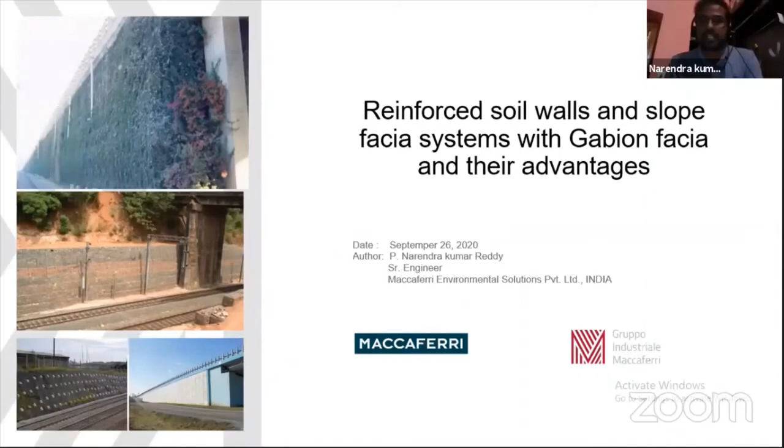Taking this opportunity to share some of the knowledge we have learned during our experience, I would like to give a concept of reinforced soil walls and slope fascia systems, especially the advanced technology ongoing in India with Gabion fascia, and their special advantages compared to conventional systems.

Covering all the chapters under this topic, I would like to cover the typical problems and the solutions we can provide regarding the same, the design guidelines for reinforced soil slopes as well as soil walls, along with Gabion gravity walls, which are an advanced gravity retaining wall taking a major part of projects in India, and various case histories covering these types of flexible retaining walls.

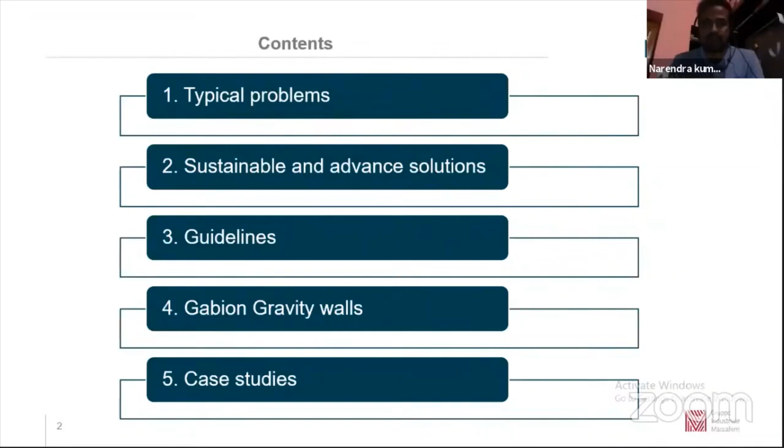Coming to the typical problems where we observe these types of failures, and how we can address them with suitable solutions: whatever the infrastructure, whether railways or highways, we observe sudden failures at sites, such as deep-seated failures and surface erosion. Natural slopes, steep slopes, highway embankments or railway embankments not properly taken care of during construction also show these failures. The major cause is improper drainage of the in-situ soil as well as natural cut slopes, or improper drainage facilities not taken care of during construction of these highway embankments.

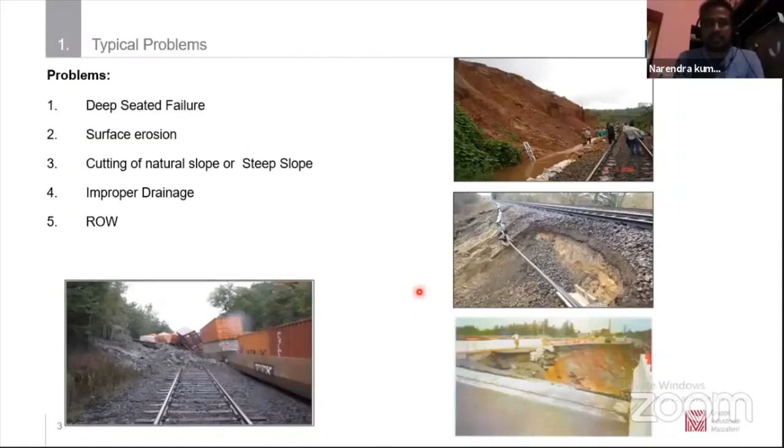Also, in some places there will be right-of-way widening issues, where emergency construction might have been done due to emergency projects, and proper steps might not have been taken in constructing this type of infrastructure. How to address these problems we can discuss in the later slides, along with related solutions we have developed through so many projects, covered in case histories in the later slides.

Before that, I would like to give a concept about the reinforced soil system. Every civil and geotechnical engineer might be aware that soil or any granular material is weak in tension, and to reinforce it we include synthetic material, whether geosynthetic or metallic reinforcement. We term this as reinforcement, and this entire concept has developed so many projects all over the world, with advanced solutions developing day to day.

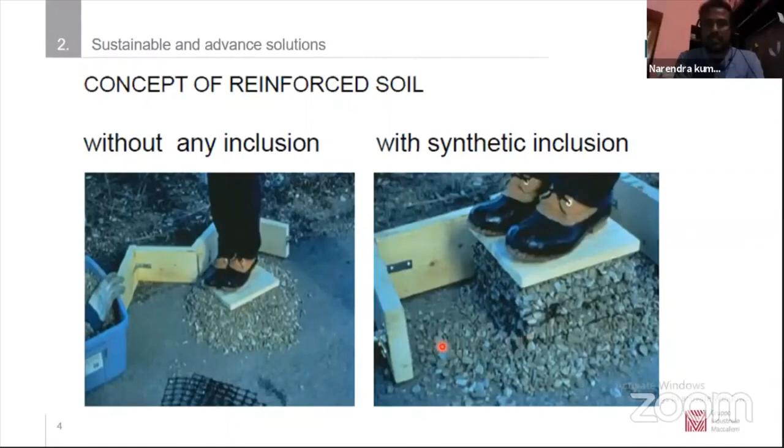I would like to give a brief of this, and how various types of geotechnical solutions can be addressed with these reinforced soil slope systems as well as soil wall systems.

Before going into the depth of the main agenda and the main systems I would like to discuss, I would like to give a brief about the types of walls based on various fascia systems. Our colleague has already provided details of the concrete fascia panel system, covering this discrete panel system.

This is the wraparound fascia system, in which the reinforcement material itself acts as the fascia as well as the reinforcement material for the reinforced soil walls as well as slopes.

And here comes the segmental block system, designed based on regular spacing of the reinforcement along with a suitable fascia system applicable for the project site condition, either the Gabion fascia I am going to explain, or the concrete type of fascia.

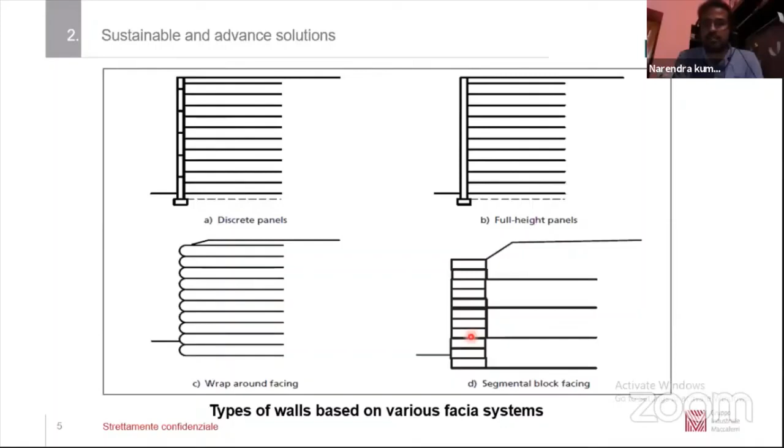Coming to reinforced soil slopes, wherever we observe landslide failures or hill cut slopes with ample space to stabilize, we can go with shallow slopes - that is, reinforced soil slope with gentle slope material. Wherever there are space restraint problems at site locations, we can give reinforced soil slope with steep slopes, which may be greater than 45 degrees. With a confinement system, we can provide advanced geotechnical solutions along with reinforcement to stabilize that failed slope.

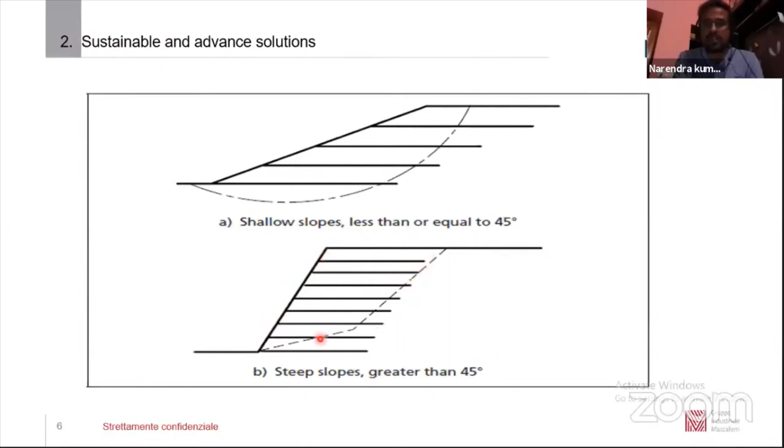Before going into types of fascias and reinforced soil walls and slope systems, I would like to give a brief about how we arrive at the design of the structure. After visiting the site as an engineer, any client facing a problem at the site will first request us to visit. After visiting, we should analyze the size of the structure that can be feasible at the site.

That is the initial size of the structure, whether as per designs it will be feasible or not. Then we can quickly model the same in any reputed or universal software, with some external stability checks that need to be checked. And there comes the selection of the type of reinforcement.

If this reinforced soil slope system is the only geotechnical solution suitable for the site condition, we should first check the type of reinforcement suitable for that environment. Based on that, we should check the internal stability of each and every reinforcement we will give as input for the design.

Coming to that, there are three types of design methods, covered in any codal provision. In that, we should check the tensile forces of the reinforcement required for each layer of the reinforced soil systems.

And we should check the internal stability. Under internal stability, based on various design methods, there will be various design checks for the reinforcement. In one method, rupture and adherence of the reinforcement should be checked. In another method, we should check the adherence capacity of the reinforcement with the reinforced soil fill. Then wedge stability check, as well as serviceability under the settlement criteria, should be checked to confirm the design.

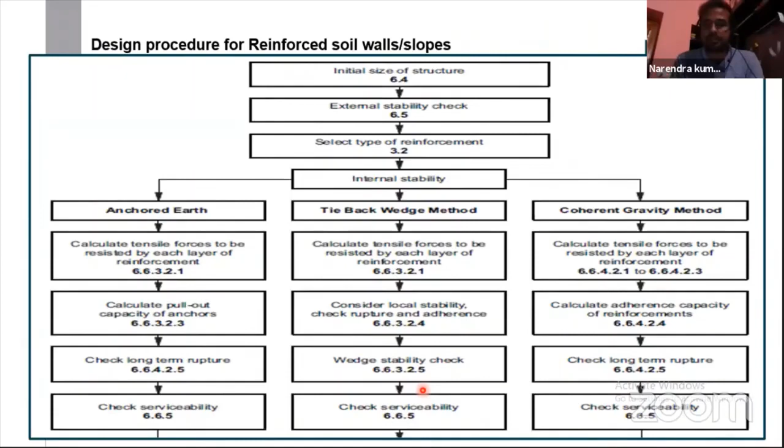Coming to the minimum geometries which we can judge at the site, we should check this, and there should be a thumb rule for the site after visiting it, regarding what type of structure can be feasible for retaining the slopes there.

For example, if we have only 3 meters minimum available, we should give a design for 15-meter height. Say the height of the wall required will be 15 meters. Then walls with normal retaining function should have minimum reinforcement at the base of about 0.7 times the total height of the wall, or that much space is not available at the site.

At least 3 meters minimum we should start with for the geometry. Based on the various types of abutments, as well as trapezoidal walls and abutments, as well as stepped walls and abutments, various types of reinforcements and geometry will be cross-checked as a thumb rule, and then we can step into the design part.

For walls less than 1.5 meters, generally this type of normal retaining wall can be constructed as well as designed. And I think these trapezoidal walls and various other types of walls have been covered by our colleague Mr. Harshit in the earlier session.

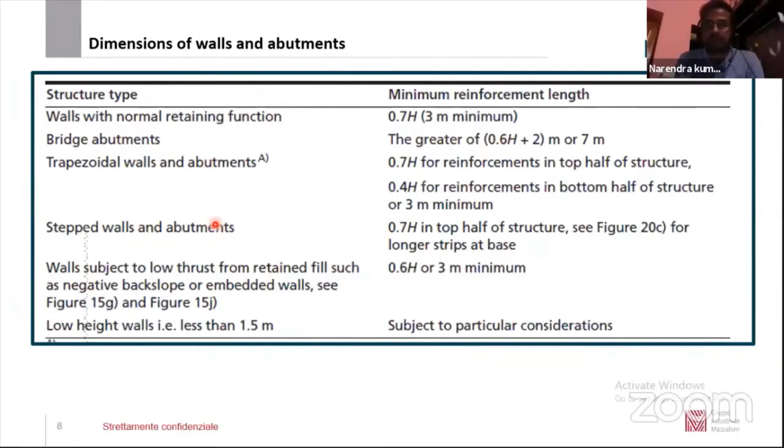Coming to the stability checks, this might have been covered by our colleague, but I would like to detail it again. Whatever the external stability checks for a wall may be, after modeling and cross-checking suitability for the site condition, we should check as per the foundation soil availability whether that wall is safe under bearing or not.

As well as tilting failure, and whether the entire block of the soil wall is safe in sliding or not, we need to check that. And as an overturning stability and overall stability, whether it is safe or not, that also needs to be checked.

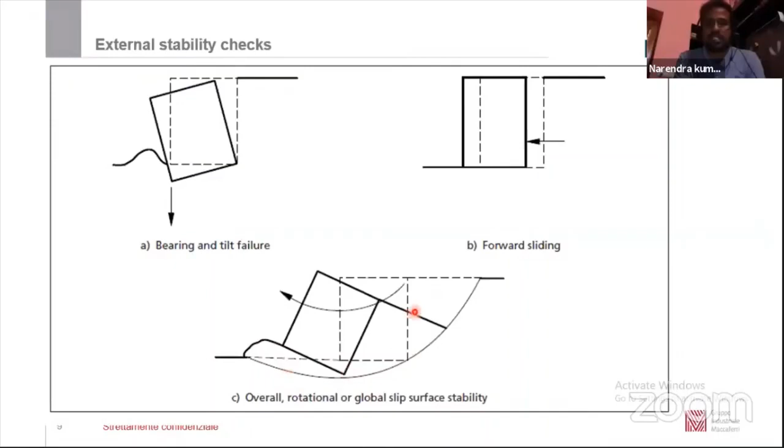Coming to the same, based on different applications and different codes, whatever it may be, we will be choosing so many Indian standard codes as well as whatever is suitable for the particular type of flexible system.

We will be using, as per BS 8006 part 1, it talks about so many loads and additional factors which need to be considered under static analysis. Under static condition, for each and every stability check, the factor of safety will be 1, because in addition to the loads there will be some partial factors which we will be taking into account.

In terms of seismic analysis, as per the FHWA, we will check the external stability analysis, as well as internal stability, which is how much strength of the geogrid is required for the entire soil wall and soil slope. For this we will target a factor of safety of 1.125, varying as per the various codal provisions. The perfect design will be one that is safe considering all types of design codal provisions.

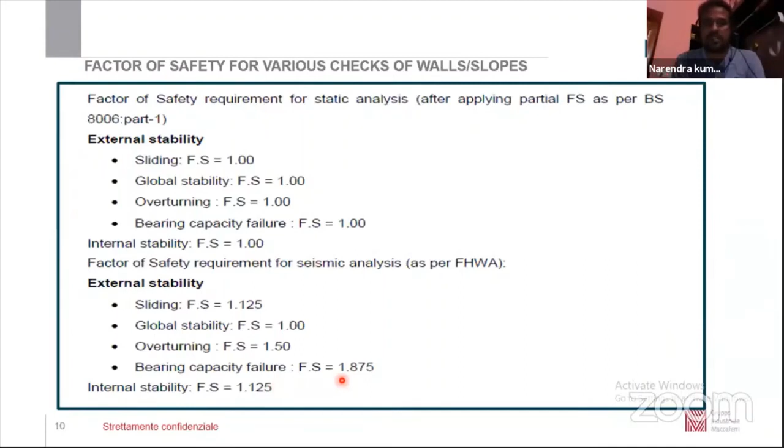Coming to the various types of reinforced soil walls, based on the fascia as well as the reinforcement, and obviously the reinforced soil fill as well as backfill will be the same as per the highway guidelines.

Based on the fascia, there will be some types of concrete fascia panels, or else where the drainage facility is not good, we should choose a good fascia system which is good in terms of fascia as well as drainage facility. This type of gabion fascia material can also be used.

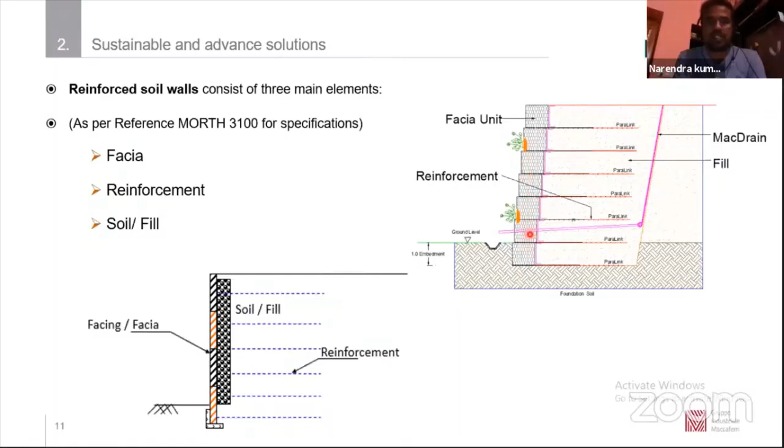Coming to the classification of reinforced soil walls as per the reinforcement material, which we will be choosing based on the requirement for the project, it has been classified into two types.

One is geosynthetic materials, and the other is metallic strips. Geosynthetic materials are mostly useful for so many projects under reinforced soil walls, as the elongation and adjustable strain value will be more compared to metallic strips.

And under geosynthetics, we can use two types of geosynthetic materials. One is geostrips, that is polymeric strips, which are usually used behind concrete fascia panel systems, which our colleague Mr. Harshit has earlier explained in detail.

Geogrids can be used behind this type of gabion fascia retaining walls as a primary reinforcement for the reinforced soil wall. Under the metallic strips, high adherence galvanized steel can be used, along with this type of anchor systems, which I covered earlier under the anchored earth systems. This type of gabion fascia with a tail system can also be used as a primary reinforcement.

When compared to geosynthetic strips, these metallic strips will not be vulnerable in the same way. These metallic systems come under inextensible reinforcement, whereas geosynthetics are extensible. Compared to the loading due to soil, the extension of metallic strips will be somewhat very less than flexible geosynthetics. These will be mostly preferable for the fascia system only.

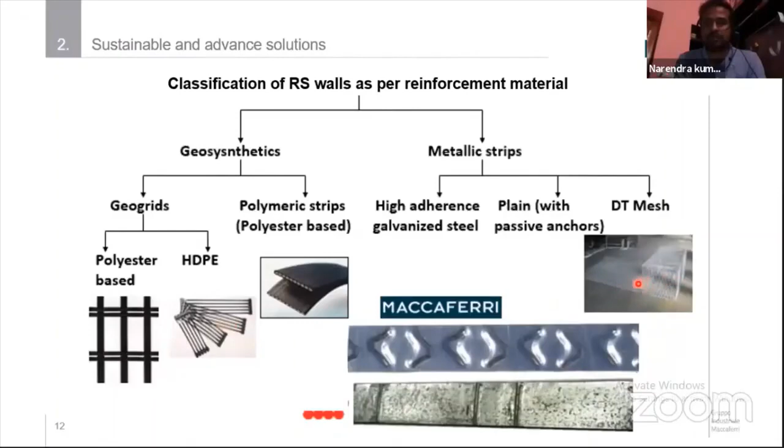These are various types of fascia systems, along with some pictures of projects. This is the stone fascia system, which our colleague briefly covered in 1 to 2 slides earlier, and I will cover it in detail. This is the greenery fascia system, where the reinforced soil slope can be stabilized with the help of greenery as well as reinforcement in the reinforced soil fill. This concrete fascia panel has already been covered by our colleague in the earlier session.

This is a gabion gravity retaining system. This is nothing but a replaceable solution for so many concrete and RCC retaining walls all over India. This is a flexible and drainage-free solution for many types of slope stabilization and toe walls for infrastructure projects.

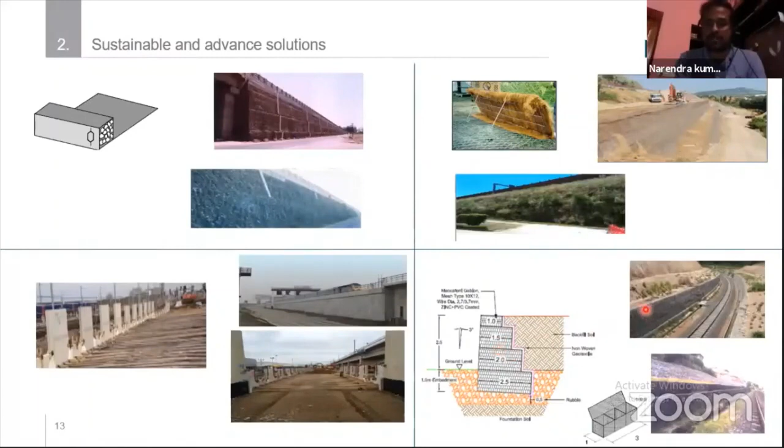Coming to the fascia systems in detail, the description of the fascia systems. The first one is the stone fascia system, which we have explained - that is nothing but the gabion fascia. This term refers to an advanced technology for fascia systems, manufactured using hexagonal double-twisted mesh.

This is not a simple type of steel wire mesh - it might be coated with galvanizing as well as advanced polymer coatings, which protect the fascia from any external environment. This fascia system is filled with rocks and boulders, and has an additional tail which gives additional frictional connection to the geogrids, used as the main reinforcement for the soil wall system.

Coming to the slope fascia system - as I explained earlier, based on space availability of the structure and the site, we can use this type of green fascia system. We term it green fascia system because the soil exposure to the environment is not good, so on the fascia system we can use bioengineering measures like coir mat, which supports the growth of vegetation on the slope.

The slope fascia system consists of weld meshes or additional galvanized plus PVC type advanced polymer coating material. In the tail part - the primary reinforcement part, as explained earlier per the gabion fascia unit - some type of advanced coating material will be used as secondary reinforcement. As a primary reinforcement below this system, geogrids can be installed along with this primary and secondary reinforcement unit, so that high structures of reinforced soil walls can be constructed.

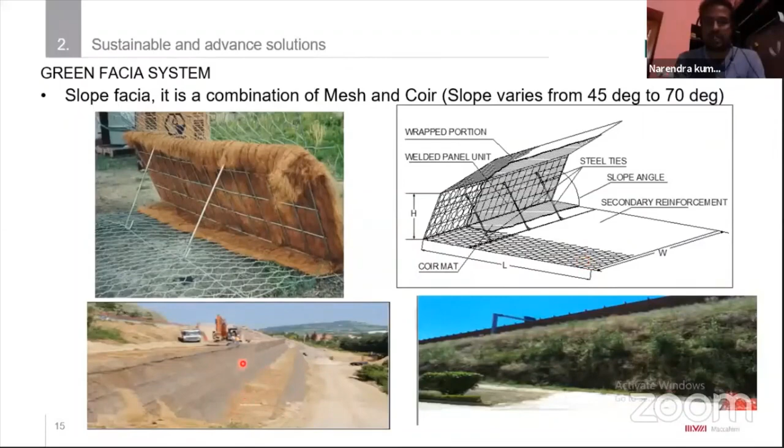This has been explained earlier. Coming to the combination of gabion fascia and green fascia - wherever at the toe we face space restrictions for construction, up to a height of say 5 to 6 meters, if we need to give vertical fascia, we can use this combination of gabion fascia and green fascia system.

Coming to the various components of the reinforced soil structure fill as well as reinforced soils as per the MORTH specifications. The gradation of the structural fill, which we need to use behind these reinforced soil fills behind the fascia system, should govern as a percentage passing, and the plasticity index should be less than or equal to 6, with angle of internal friction greater than 30 degrees. If these properties are not available as per site conditions, we can cross-check whatever is available, but it should at least be drainage-free material and adjust to the design considerations.

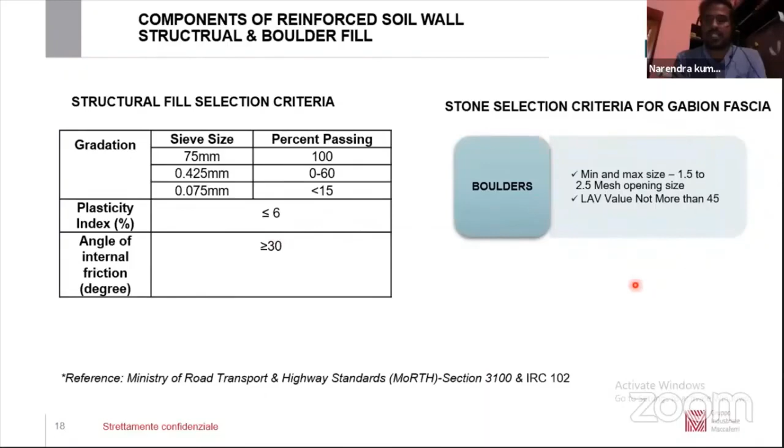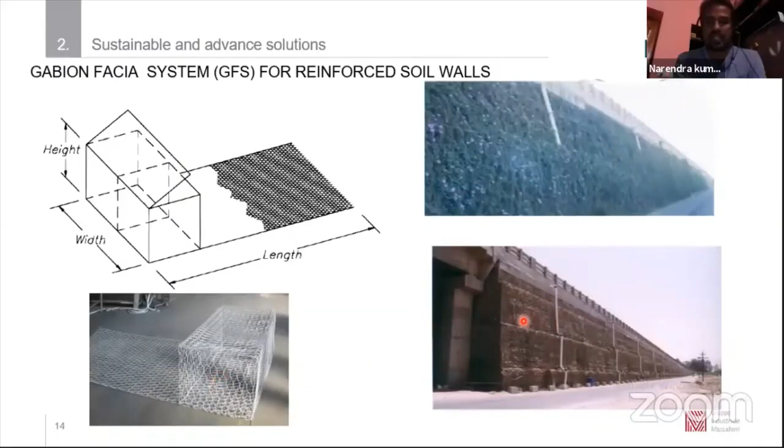The stone selection for the Gabion fascia should be 1.5 to 2.5 times the mesh opening size. The mesh opening is clearly shown in this image. These mesh openings will be there, from which the stone should not easily come out. So for the fascia design, stones filling it should be 1.5 to 2.5 times this opening size, so that the stones cannot easily come out of the fascia system.

Coming to the drainage system - in earlier slides I discussed the fascia system and the reinforcer system. For the drainage system, how effectively a reinforced soil wall, soil slope, or any reinforced soil system functions is based on having a proper drainage system behind the reinforced soil wall. This is general practice from old technology over many years - a 600 mm thickness of gravel material with filtration and separation membrane should be used properly behind the reinforced soil walls to properly drain out the water.

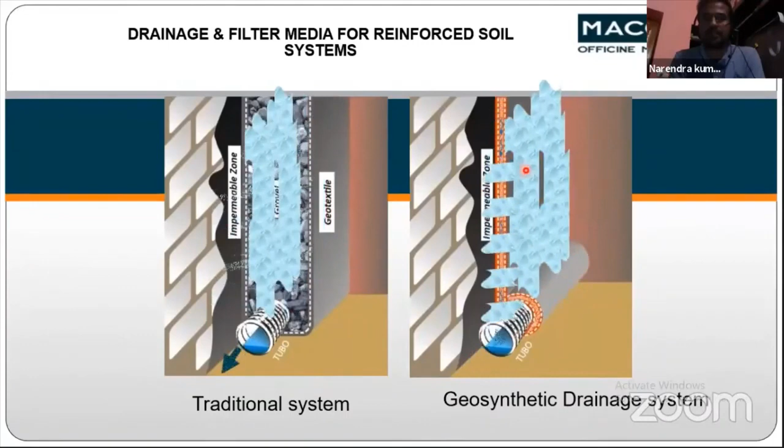Now the technology has advanced, and instead of this 600 mm, a thin drainage composite material of 0.4 to 0.5 mm thickness, an advanced geosynthetic material, has been developed. What it actually does is collect the water properly and prevent it from affecting the reinforced soil fill behind this drainage composite, draining it out properly. Compared to granular material, which as per site conditions has filtration and drainage issues over a prolonged period - causing choking of the reinforced soil fill and clogging of the material - the drainage composite performs better. A detailed picture of the drainage composite is in the next slide.

This is the drainage composite material. I think this may have been covered by our colleague in an earlier session, but I can give you detailed information on the same. Both sides consist of geotextile material - either non-woven or woven type - which takes care of filtration and supports the function of the reinforced soil system, preventing the soil material behind it while only allowing water through. This is the core material. On applying it behind the vertical fascia, it collects water properly from top to bottom, and at the bottom it is connected to the PVC pipe.

Reference codes under which this drainage composite and the comparison between granular material and the drainage composite can be done are as per MORTH sections, as well as IRC SP 59 and various other Indian Road Congress material codes.

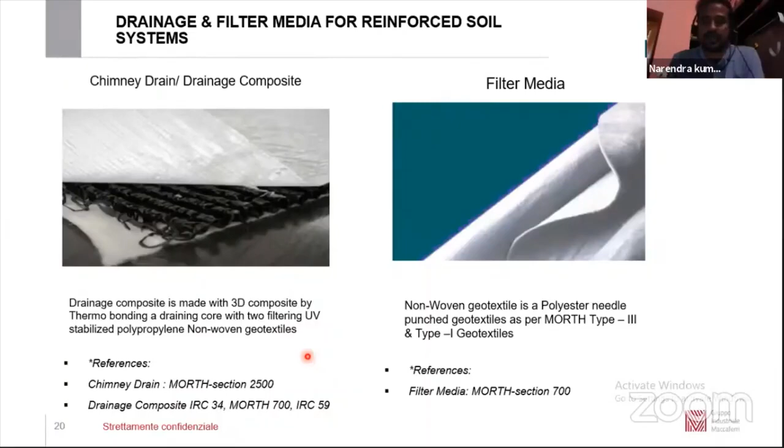These are the guidelines under which various types of fascia systems and reinforced soil systems have been covered. Coming especially to the Gabion fascia systems I have been talking about, the specification should be as per IS 16014:2018 code. All over India, or wherever we design with the Gabion fascia system, these specifications should be prevalent as per this code. The steel wire and wire products should be properly judged before getting approved in any project.

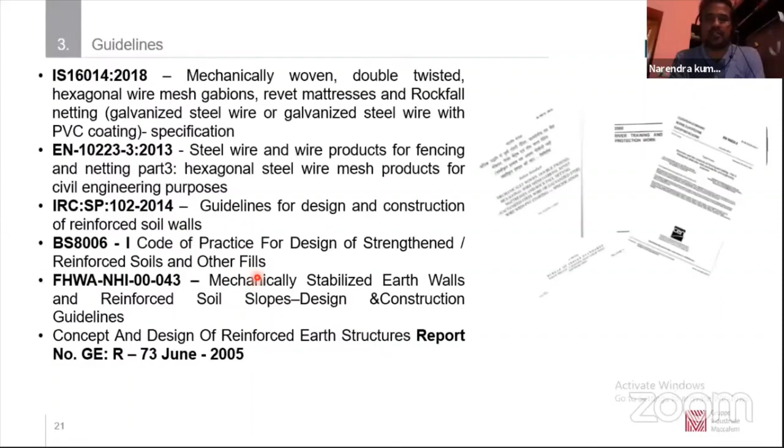Coming to the design part, IRC SP 102 gives total guidelines for the design and construction of reinforced soil walls, and it talks only about reinforced soil walls. BS 8006 is a general practice for both reinforced soil walls and slopes. And this is the FHWA guideline under which MSE walls - mechanically stabilized earth walls - as well as slopes will be designed and constructed. These three types of codes can be cross-checked parallelly for the full-fledged design of any reinforced soil wall as well as the slope.

Till now, any queries, sir? From anyone regarding the Gabion fascia systems as well as? Yes, sir, we will address questions at the end of the session. Okay, it's okay, sir, okay.

Completing the part on reinforced soil wall systems: for higher heights of retaining wall systems, for example more than 6 to 8 meters, we will preferably go with reinforced soil wall systems as well as soil slope systems, where the cost of the project will also go higher. For example, for less than 6 to 8 meters of protection, we can generally go with RCC retaining walls as well as other concrete type retaining systems in many projects.

When compared to that, Gabion fascia system walls are also a similar type of mass gravity retaining wall, which have been developing day by day, and these are advanced systems supporting so many infrastructures in India. Coming to Gabion gravity walls, what it actually consists of is whichever I explained in the earlier session about the Gabion fascia system itself.

This is the bulk Gabion wall, which can be constructed by joining these type of Gabion boxes with the support of a monolithic system, and it will be having the fascia system with a tensile strength of 350 to 550 Newton per mm square of the wire.

The elongation should not be less than 10%, and the coating should be appropriate as per the site condition, as per the alkalinity, as well as based on various types of site conditions to which this Gabion retaining wall should be constructed.

As already explained, the boulders which should be filled in the Gabion fascia should not be more than 1.5 to 2.5 times, and the filter media should be there instead of the bulk 600mm gravel layer. A geotextile should be placed in order to separate the reinforced fill from the Gabion fascia.

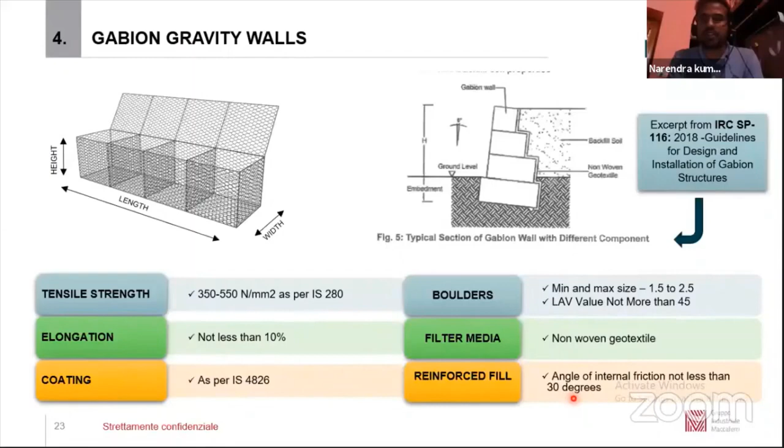I have already covered that the reinforced fill property should not be less than 30 degrees, as well as per the availability conditions at the site, which can be cross-checked with the design whether it will be okay or not for construction at the site with the reinforced fill.

Coming to the design guidelines for the Gabion wall in detail: Gabion walls are normally designed as compared to reinforced soil walls, that is, as mass gravity walls only, and limit state principles are used for this design.

There is nothing but normal static and seismic conditions under which normal external and internal stability checks are done, similar to how we check for reinforced soil walls. This will be applicable for Gabion gravity walls as well.

But when compared to normal gravity walls as well as RCC walls or any retaining walls, these Gabion walls should be constructed and designed based on many configurations which will be feasible for the site.

For example, in some locations, a stepped outside Gabion should be there, which should support this type of backfill. In some locations, inside protection should be there with some batter in order to prevent further sliding, which can be achieved by constructing a toe wall with stepping inside.

In some locations, only a simple type of standing Gabion with a normal offset on both sides can be supported for any types of gentle as well as normal slidings which we observe at the site.

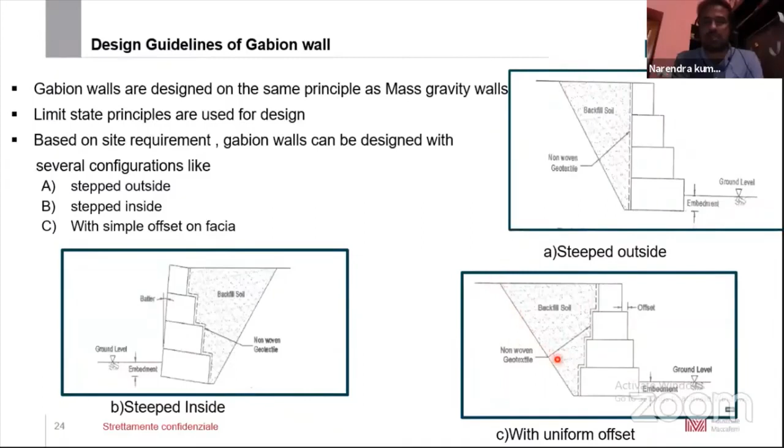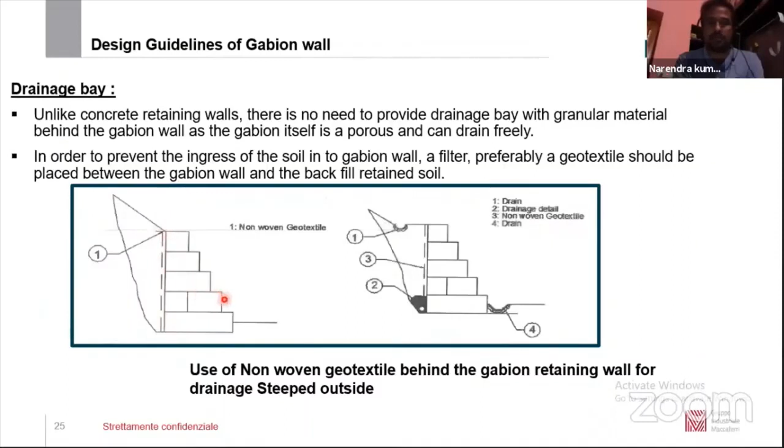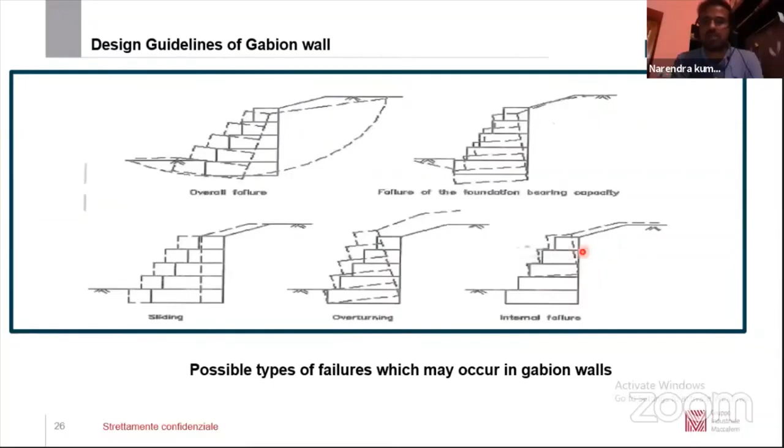Coming to the design guidelines, covering both static and seismic cases for each and every check for the gabion wall. Under global stability, that is nothing but overall failure, which I have shown in this slide. Under static case, we should target a factor of safety of 1.3 for walls and 1.5 for support abutments and building supporting walls, and 1.1 in the seismic case for global stability.

Coming to the sliding failure of the entire wall, we can target 1.5 for the static case and 1.25 for the seismic case. Under the bearing capacity, 2 to 2.5 is preferred for bridge abutment walls, as so much surcharge loading will be there. For other important structures, we should majorly target 2.5 bearing capacity. In the seismic case, 1.5 will be sufficient for normal retaining walls, and for important structures, 1.875 is required.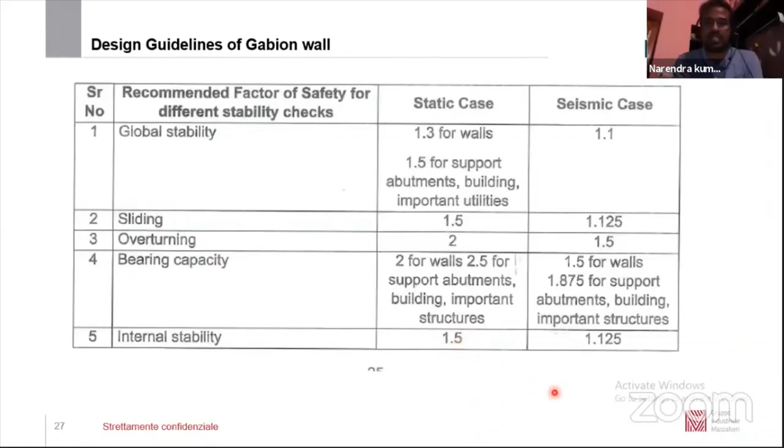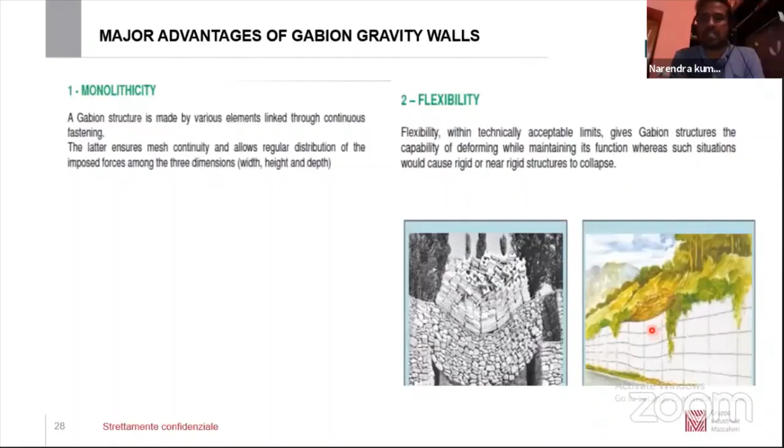As already highlighted in the title, there are many advantages when compared to normal retaining walls. A gabion structure is monolithic in nature, connecting various gabion boxes to form a normal mass gabion wall. Unlike concrete retaining walls, it is not a rigid structure; it is flexible in nature and can adjust to deformations observed at the site. If any problem, miscommunication, or design misinterpretation occurs and causes damage, it can be easily replaced and adjusted as per site conditions. That's why it is flexible in nature.

And these are some installed conditions at the site.

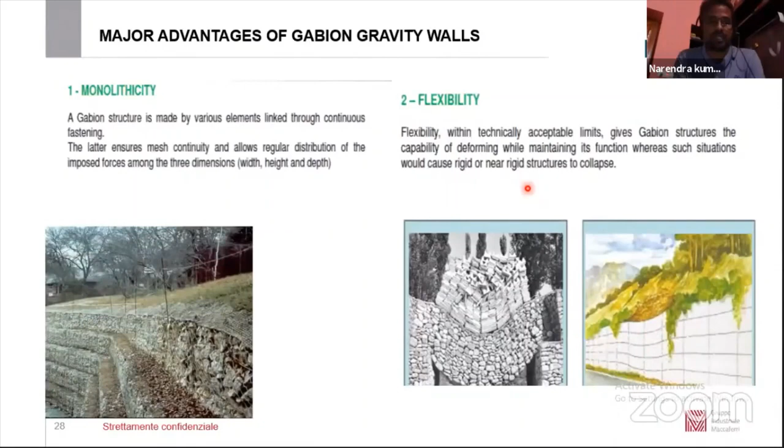I have already explained about the permeable nature of the gabion structure. Whatever water percolates through the backfilling material, with the support of geotextile, can only percolate out through this gabion retaining system. It is simple and economic in nature, easy to install, and no much skilled labor is required, so construction can be completed very quickly. For example, a 5 to 6 meter wall of around 100 to 200 meter stretch length can be completed in just 1 month, if the full-fledged material and stones are available.

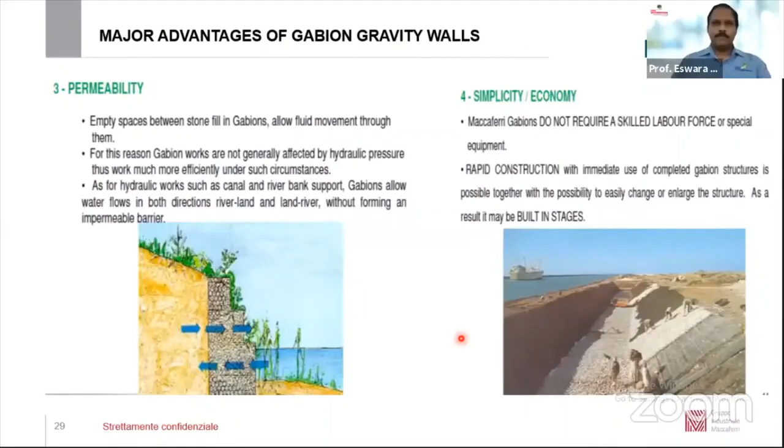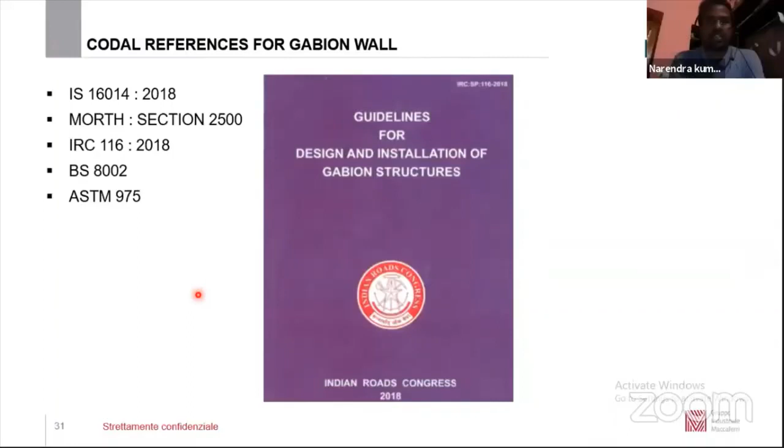Coming to various advantages when compared to the conventional system, I have already explained about the flexibility of the gabion system. These are flexible and permeable in nature, and environmentally friendly, because concrete walls usually have problems with carbon emissions and carbon footprint. This footprint can be reduced by using flexible reinforced soil wall systems as well as gabion facia systems, which can tolerate large deformations without distress. In the case of concrete retaining walls and conventional systems, differential settlements occur and they can't adjust to these settlements; they are also limited to certain heights since they need to be constructed bench-wise. This type of flexible reinforced soil system can be constructed from 50 meters to 100 meters.

Skilled labor is required in terms of RCC walls when compared to the flexible retaining systems. These are easy to construct, and only unskilled labor is enough at the site, and with just normal guidance they can construct it. This is very slow due to the additional requirements of curing.

All these things will be required in case of reinforced cement concrete walls, whereas in terms of Gabion walls only the material is required and everything will speed up. Large foundation pressures need to be handled for a good foundation, and foundation preparation required will be very minimum in case of these reinforced soil walls.

Responding to seismic forces, these are highly flexible. As I have already explained, due to seismic events if any huge damage occurs, this can be addressed quickly even while constructing, whereas in concrete retaining walls the entire structure should be scrapped.

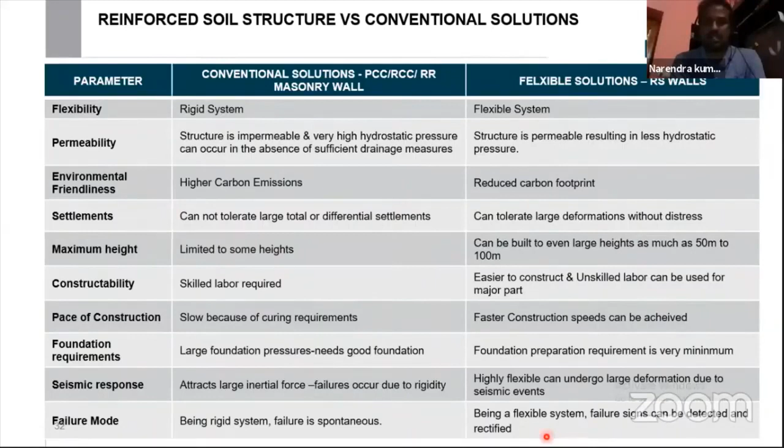As it is a rigid system, the failure mode will be spontaneous. Because in the flexible system, failure signs will be detected and can be rectified based on the ongoing project, as well as the systems supporting us.

Covering all these things, so many case studies are there to explain, and I have collected a few important ones covering most of the southern part of India.

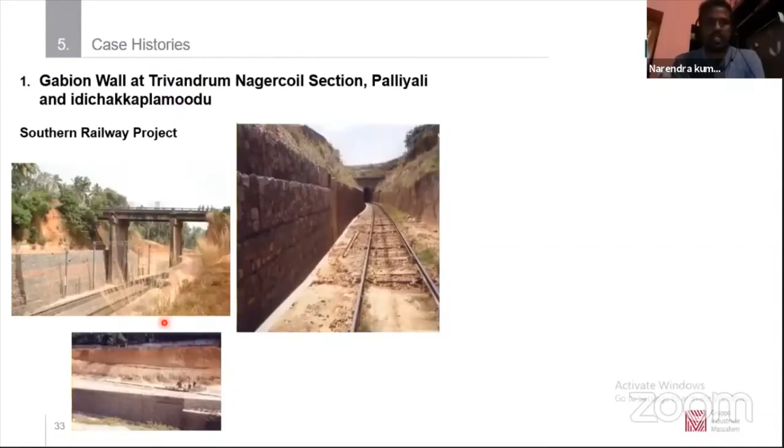For the Southern Railway project, there is a huge slide failure besides this railway track under Southern Railway, at Palliyali in Kerala. Here, they have used this flexible and Gabion fascia system retaining wall only to support this sliding failure of the in situ soil.

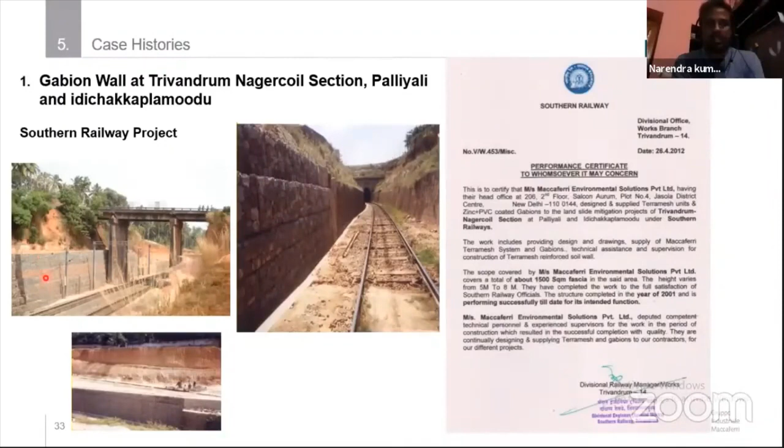This is one of the prestigious projects which is the basis of Maccaferri also, and we learned a lot from this type of huge project.

This is the Sikkim Airport project. The main client is the Airports Authority of India, and this major project is the construction of the new runway for Sikkim Airport, and the contractor is Punjlloyd.

The major operation of this project requires the construction, and before the construction, the topography in the Google map is like this - full of greenery, with no evidence to investigate. The output required by the client is this new construction of the runway.

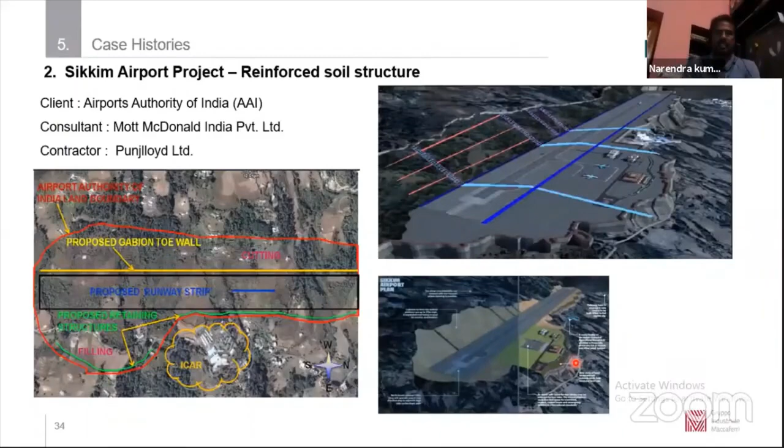Some cutting and filling operations should be done considering the hill and valley side. This is the view of the site before construction, and this entire cutting and filling should be done at this location.

This is the basic scheme of cutting and reprofiling on the valley side, and the runway should be here. This is the formation level of the runway, and this is the expected scheme.

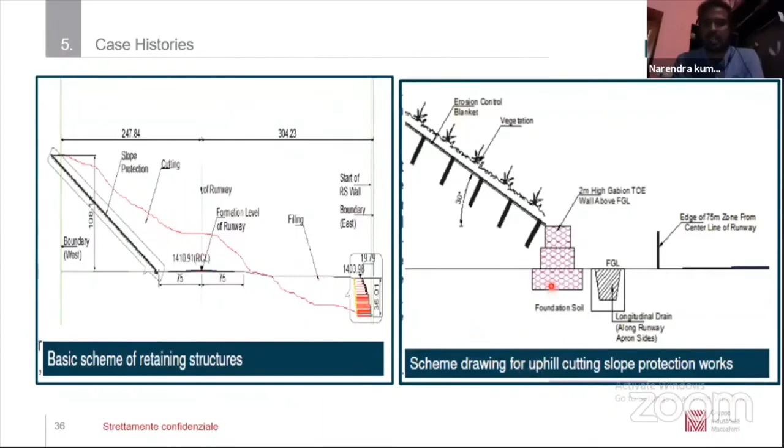For the uphill cutting, a Gabion toe wall has been suggested after removing this entire cut-fill portion, balancing while taking the design into consideration for proper and controllable cutting and filling. Slope protection and erosion control measures are also suggested on the hillside.

At the valley side, for drainage purposes, this is the drainage scheme for cutting and the toe wall at the valley side.

On the hillside, for proper erosion control, this is an erosion control mat - a bioengineering measure which has been suggested in order to not expose this type of valley hillside soil material to the atmosphere. It will take care of the greenery, and it is a bioengineering measure.

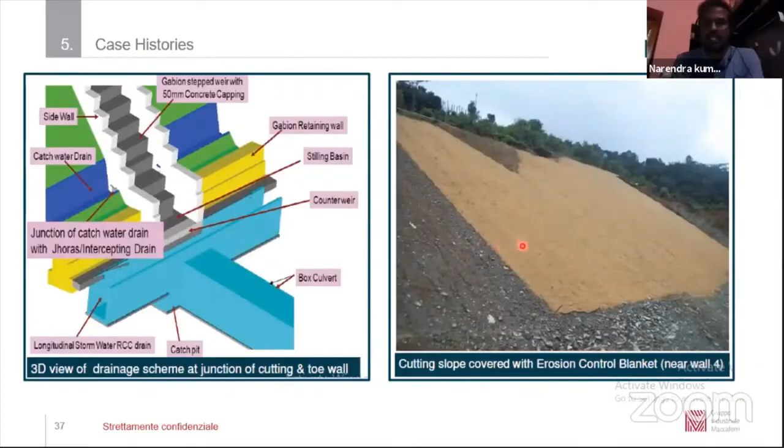This is the total height of the valley side wall, 72 meters including the surcharge, and this consists of the hybrid system which I explained in the earlier slides - the vertical wall fascia as well as the slope fascia system. This is some design output from doing the design for this project.

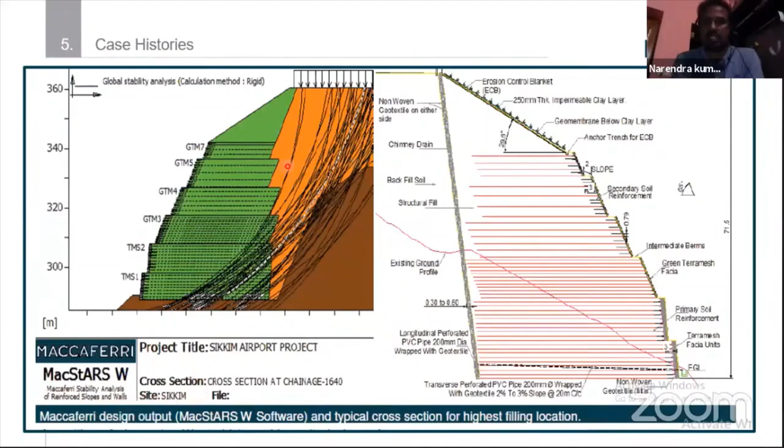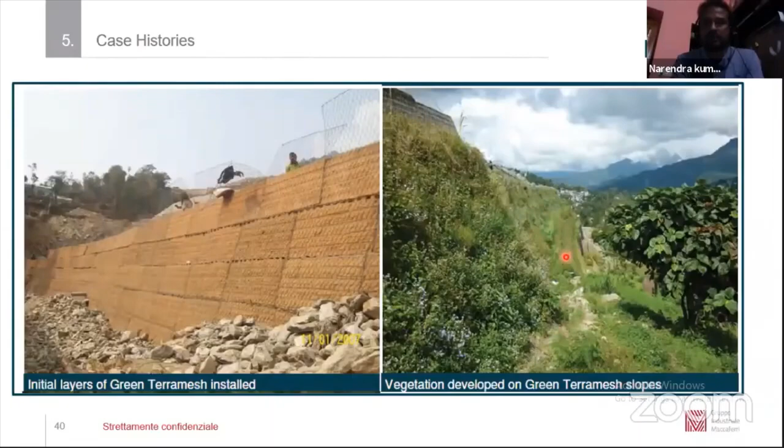This is the ultimate and present exposing fascia system at the site for the Sikkim Pakyong Airport. Approximate height is 70 meters.

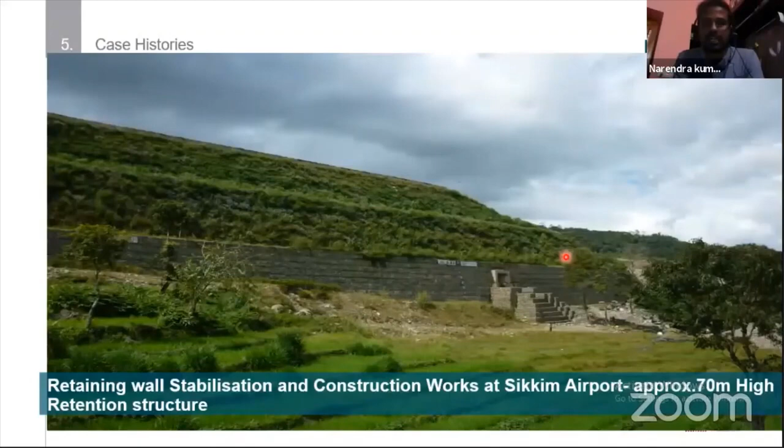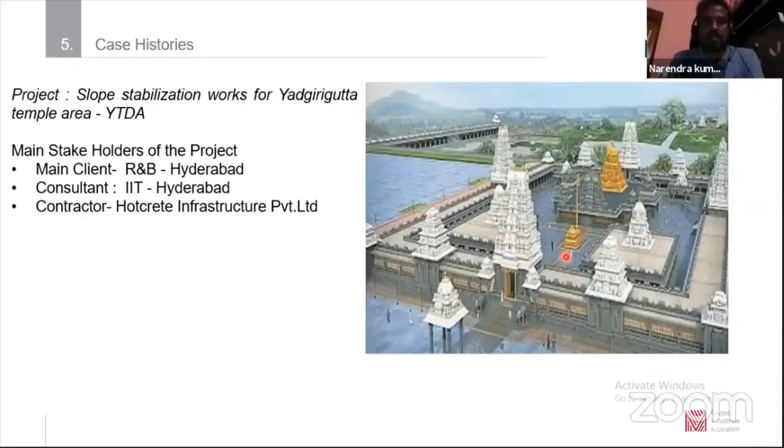This is one of the prestigious projects for Telangana under the Yadgirigutta temple area. The Yadagiri temple trust took the help of R&B, and R&B is the main client to take care of all the slope stabilization measures around the temple location. The main consultant is IIT Hyderabad, and the contractor is Hotcrete.

It is well known and reputed, yet to be developed as per the norms set by Mr. K. Chandrasekhar Rao Garu, present Chief Minister of Telangana, who initiated the renovation of the temple. The final layout has been approved, and major renovation of the temple has been undertaken with a budget of 1800 crore. For this slope stabilization measure around the temple, there was a requirement identified.

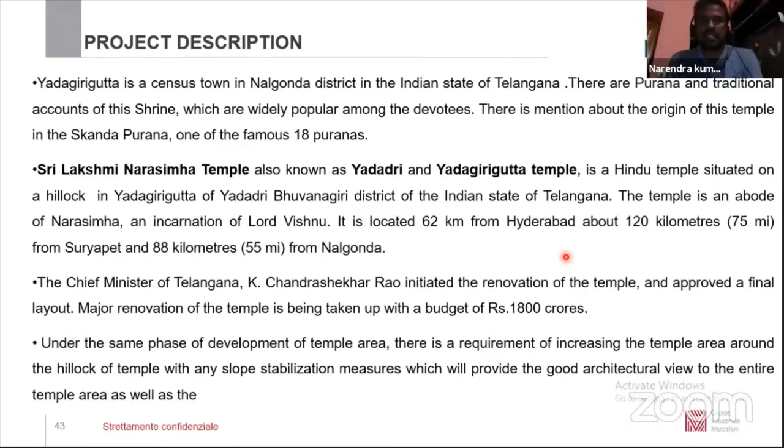They requested proposals from many executors and builders in Telangana. He took a golden opportunity regarding the same and proposed a feasible solution - a flexible Gabion fascia system for a stretch length of 215 meters at the location. The entire solution system is such that a reinforced soil structure along with pedestals over the rocky strata has been supported.

It is supported with dowel bars to take care of the sliding. It is not a simple site to construct at, because space restrictions are there for stabilizing the slope. It is a normal type of supporting as well as retaining wall only for that temple, below the temple.

But there is so much space restriction at the bottom of the reinforced soil wall, and due to this, excavation restriction is also there, as it is of sheet rock strata. We have taken support of dowel bars at the bottom along with RCC pedestals in order to provide additional stability for the movements of the reinforced soil wall.

The total height of the wall is 30 meters, and now it has been extended up to 35 meters, and it has been stopped now.

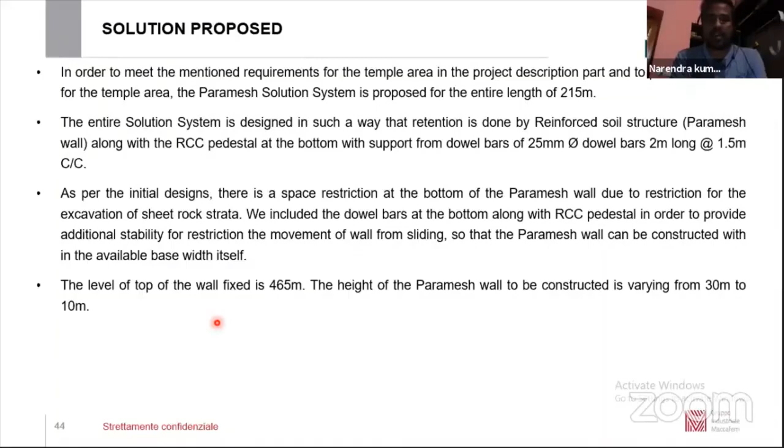This is the location of the site where stabilization of this slope is required. As per the CM sir's visit, it should not be exposed like this, because whenever there's a problem, boulders will be detached and fall onto the road and infrastructure which we are observing at the site. To stabilize this, we are using this Gabion fascia system.

Around a 35 meter height wall has been constructed for a length of 215 meters, and the seismic zone is a normal earthquake zone 3 only. The live traffic loading we have considered is 24 kilopascal over this reinforced soil wall.

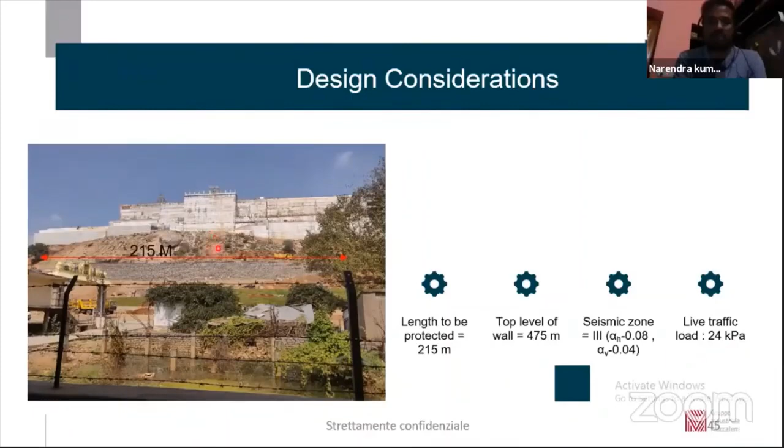These are some photographs taken while constructing at the site. This is the bed position over the rocky strata for creating a proper leveling bed. This is the installation of the geogrid - this is the primary reinforcement.

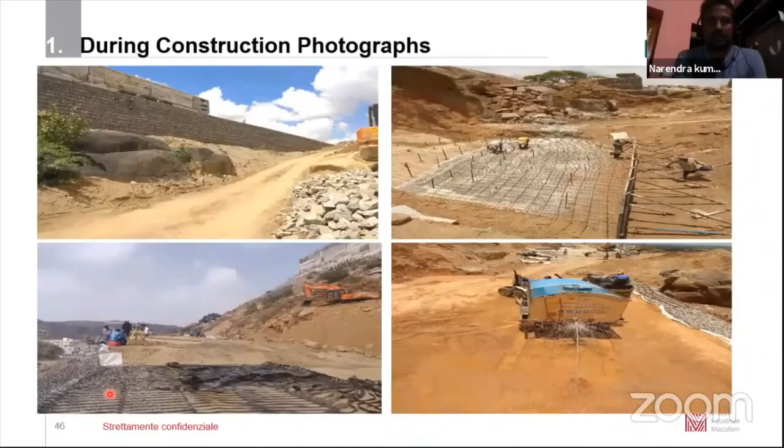I was also involved during the revision of these designs. The CM sir's visit was done in February 2019, and whatever berm widths we were observing - as per the norm, for every 10 meters there should be a proper berm of 2 to 3 meters. In the initial designs, only a 2 meter width was there.

After his visit, while construction was going on at the site, based on his good feedback, he requested a space of more than 2 meters, up to 11 meters, in between each berm. There were so many challenges in doing this, because so much excavation was required behind this wall which was under construction. In addition to this change, there was also a level change.

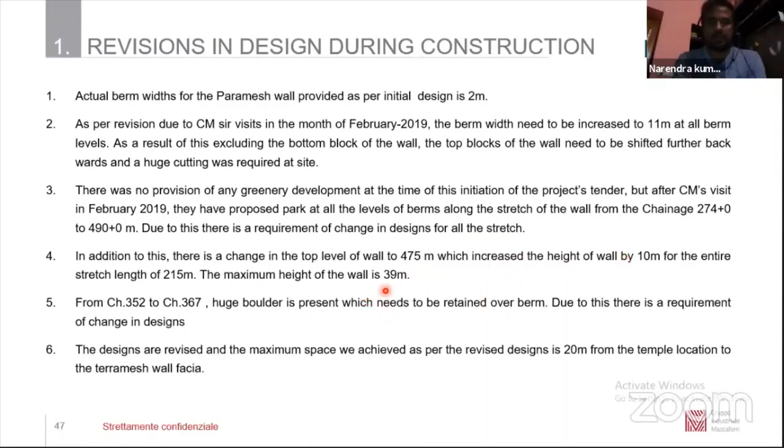Till now there was a 30 meter wall required, now it has been increased to another 10 meters height. These are all revised, and this is the ultimate and final section of the 40 meter wall. Till now it has been completed to 35 meter height, and the huge berm widths vary from 11 meters to 8 meters gradually.

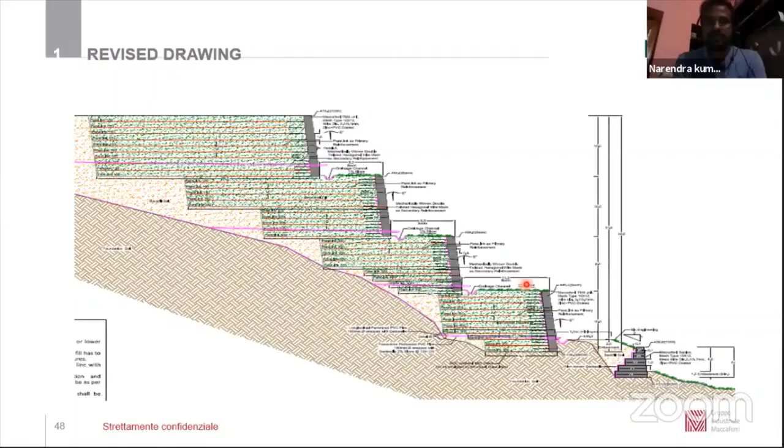These are some post-construction photographs, and it has been completed till now up to this level of around 35 meters. This is the completed structure.

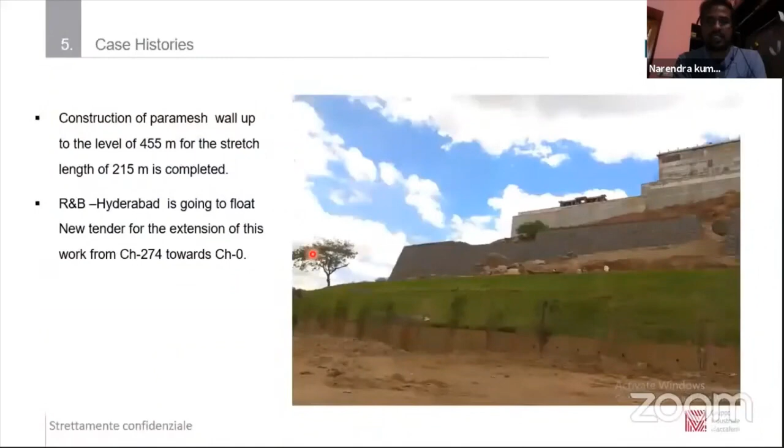Coming to the gabion walls, another case in Kerala. As we all know, under Kerala there were so many failures due to flood situations. We are under the Kerala State Transportation Projects. There was a problem at one site under Trivandrum, where the in-situ RCC wall collapsed due to deposited boulders. Due to the hillside, there's dense forest and valleys where river flow occurs. Proper measures were not taken, and a normal masonry rubble wall was constructed without considering proper loading conditions while designing, and it ultimately failed.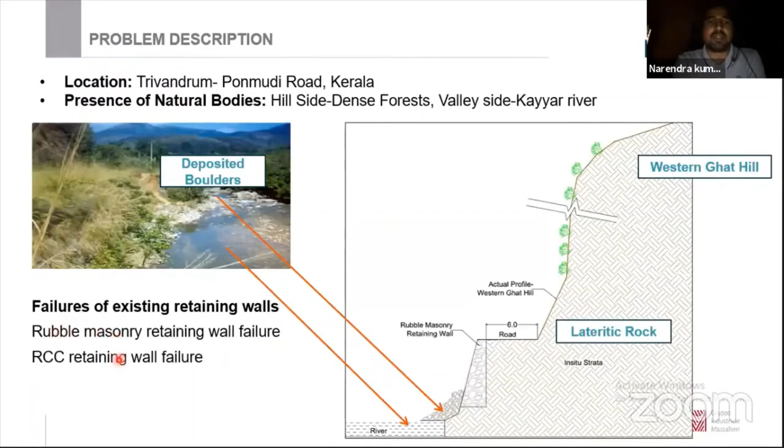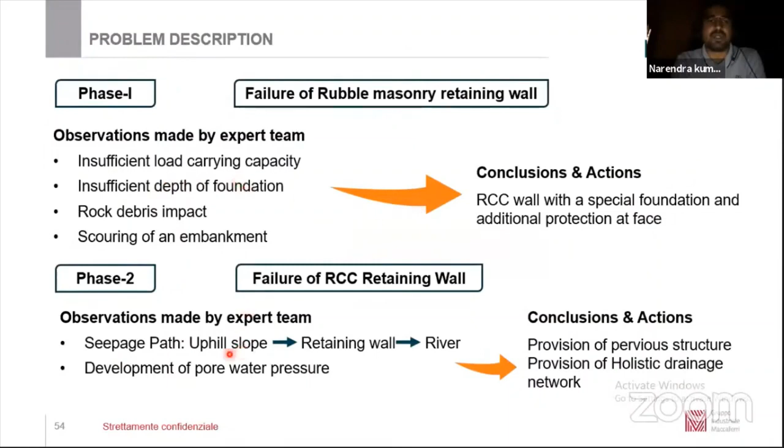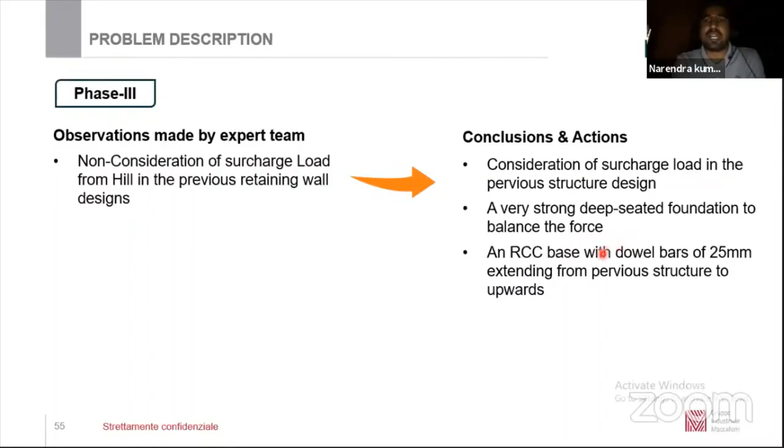Our observation was that insufficient load carrying capacity had been considered while designing the RCC wall, and this was rectified. While constructing the gabion wall, as per our suggestion, we took into account the proper surcharge load, the hillside slope load, and any expected deep seated foundation failure. An RCC base was also suggested for the gabion wall due to space restriction at the bottom.

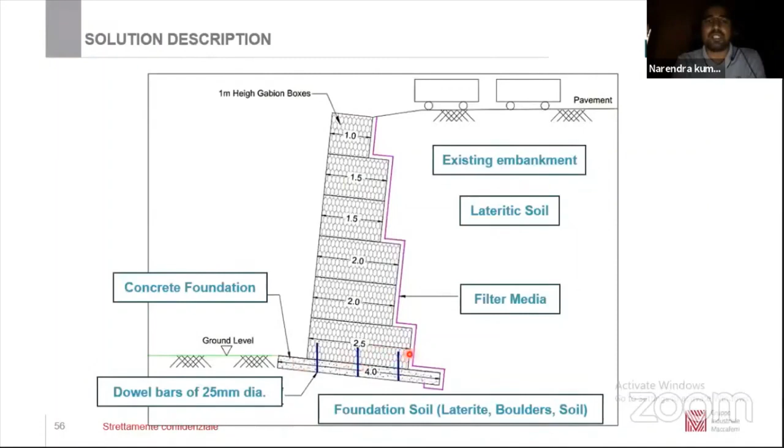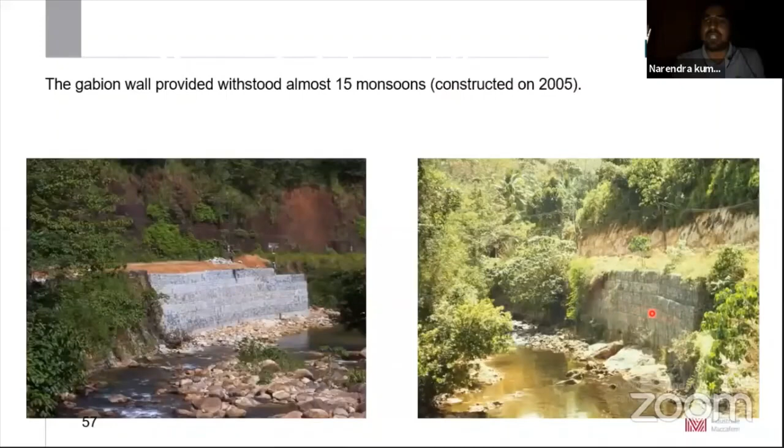This is the ultimate scheme which was finalized for the project. The entire masonry wall that was there has been removed, and this is the fascia system with the gabion wall. After 15 monsoon seasons, the structure is still intact at the site, with no problem of dismantling or collapsing till now.

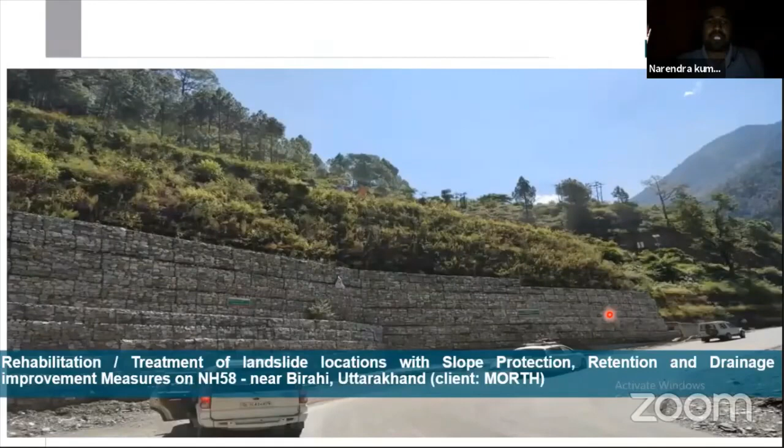This is another slope retention measure near Birahi, Uttarakhand, for hillside protection measures under MORTH. And this is another major project from Kiratpur to Nerchok section with the flexible reinforced soil slope system, which is also a combination of a hybrid system of vertical gabion fascia as well as the reinforced soil slope system.

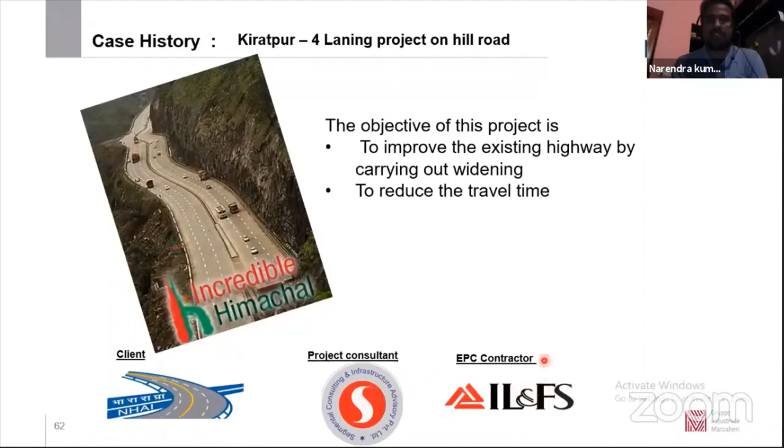The main objective is to improve the existing highway, which is the main agenda of NHAI, and NHAI is the client. The consultant is Segmental Consulting and Infrastructure, and the EPC contractor is IL&FS, and travel time should be reduced - this is the main agenda for this project.

This is also similar to the runway project of Sikkim Pakyong Airport, but this is prone to ongoing traffic also. Some challenges were there - hillside cutting should be done and valley side filling should be done here also, and proper protection measures on the hillside are also required to take care of the site construction.

What happened on the hillside is higher heights of fills required high retention heights, and land constraints are also there. At the base of the hillside while excavating, there is so much restriction at the bottom to take care of proper and controlled cutting, and it's a heavy rainfall zone that comes under seismic zone 5. While cutting and doing operations, whatever may happen at the site, we are not sure - that is a major challenge.

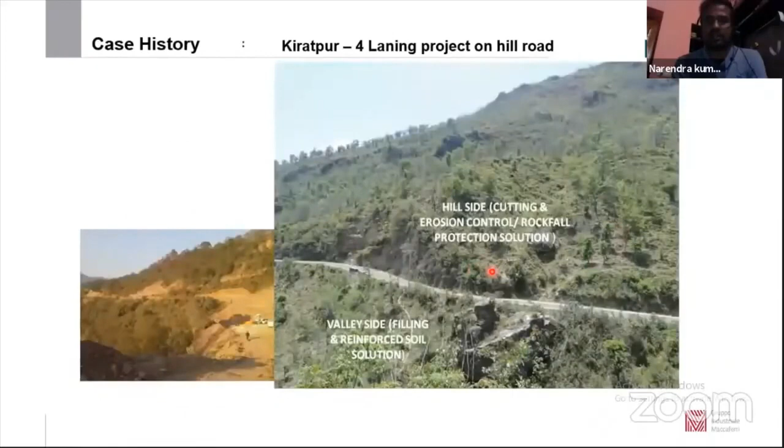The challenging working conditions are, in addition to seismic activity and heavy rainfall, flash floods and cloud bursts are there, and the type of strata we observe while excavating is unexpected.

In order to facilitate the development of the road, steep cuts need to be planned on the hillside, and whatever excavated material is available - since no good fill material is there for the valley side - that excavated material needs to be refilled and used as fill material for the valley side filling as a reinforced soil fill.

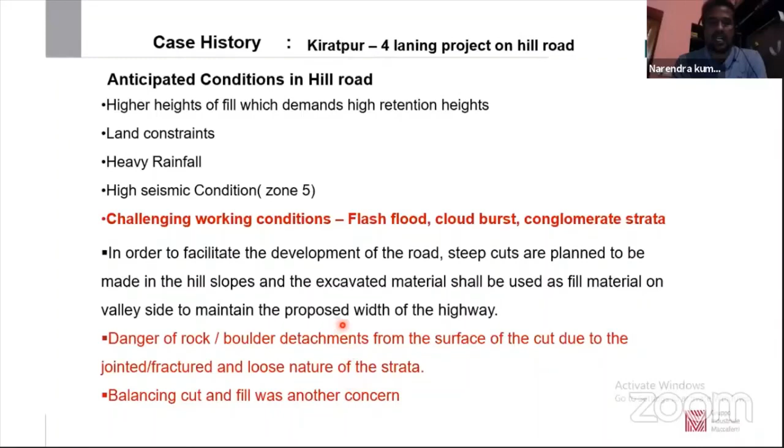Another danger is a rock or boulder detached from the surface of the cut while excavating on the hillside - this is a major challenge. At last, they went with balancing cut and fill, and that was successfully implemented. This is the entire scheme.

Coming to the hillside, from the top portion, whatever greenery we have achieved while excavating - this image will not look like that entirely. This entire area will be under the cutting portion, and after cutting, this slope has been maintained gentle with some erosion control measures provided. For the hillside, wherever rock boulders are there, this type of nailing for cut slope stabilization has been provided.

This is the major project - this widening is the major concern for this project. Whatever we took into consideration for cutting has been filled in the valley side with a proper fascia system, that is the reinforced soil wall system.

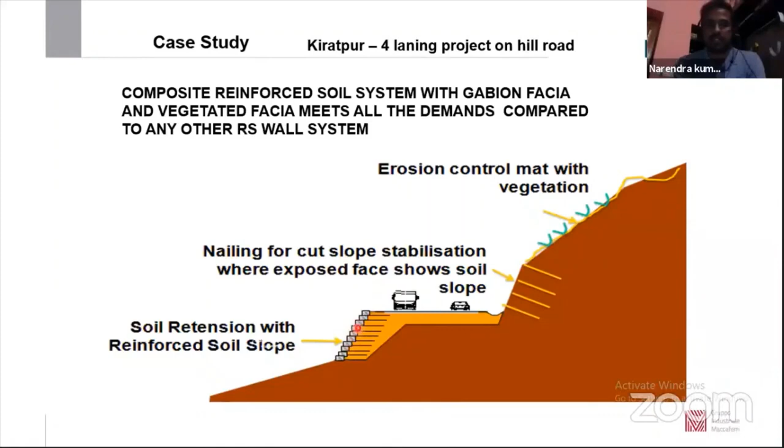And this is another design. There is some space restriction, which I have already discussed earlier. Starting from the bottom itself, the ParaLink as well as geogrid layers have been increased. This is one type of trapezoidal wall, which our colleague has earlier explained in one of the slides, the trapezoidal wall system.

And this is one classification, with the fascia system of the green fascia as well as the Gabion fascia system. We have followed this BS standard code only, and covering the FHWA standards also, the entire design checks have been taken care of.

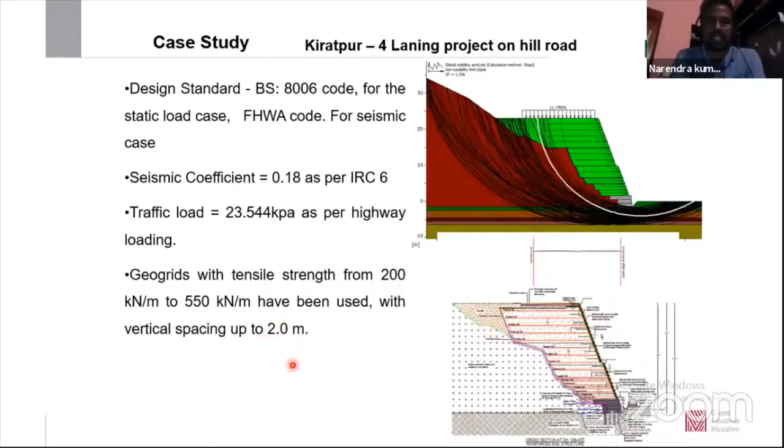The seismic coefficient, as I already explained, this is seismic zone 5, an earthquake prone zone area, and 0.18 is the seismic acceleration coefficient which we have considered. The maximum geogrid tensile strength implemented in this project at the bottom of the wall is 550, and coming to the top it is 200 kilonewton minimum requirement. Vertical spacing we have achieved up to 2 meters spacing.

On the hillside, which I already explained, there was detaching of boulders, so some rockfall barriers have been used. This type of netting as well as crash barriers have been used to collect whatever detachable boulders there may be.

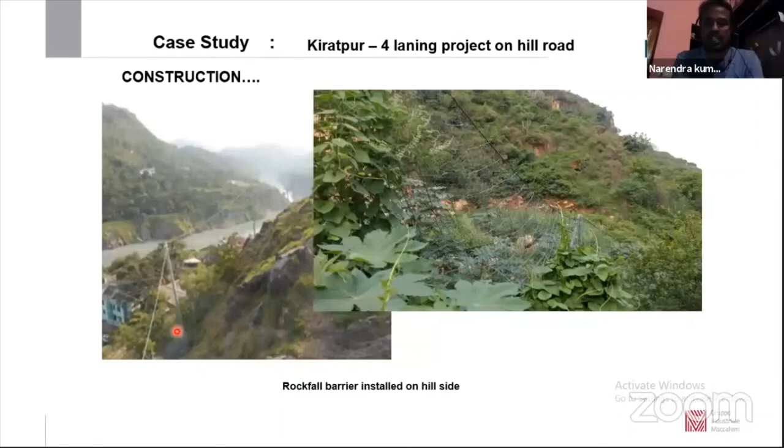Proper maintenance has been taken care of while constructing at the site. Even now, proper maintenance is going on there. These are all experiences that have led to the successful project of the hybrid reinforced soil structure in India.

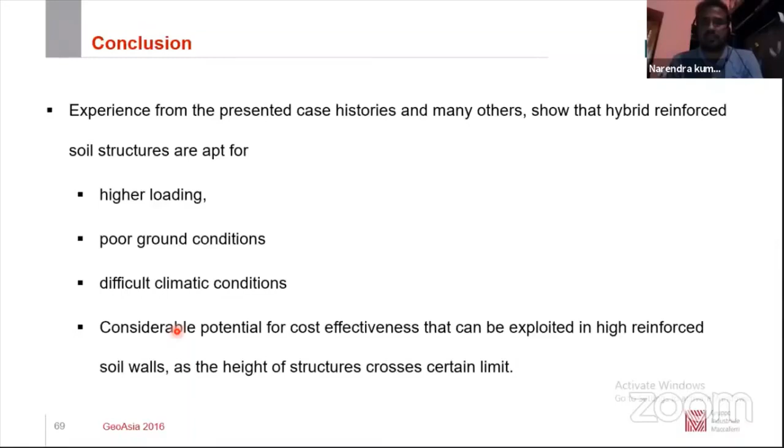So thank you for your patience, but this might be somewhat new for you all. This is a developing technology outside the world as well as in India, and it's my great honor to share my ideas regarding the same.

And for any more queries, it's open to all, sir.

Sir, we shall take a few questions from the participants. The viewers from YouTube have placed questions in the chat box. Okay, yeah, you may go ahead. Yes sir, I have placed the questions in the chat box. Narendra, could you stop sharing your screen? Yes sir. Go ahead. Sir, I have displayed the questions in the Zoom chat box. The first question is, sir, can we construct Gabion gravity walls for flood protection to reduce cost as compared?

Yes, in flood protection zones we can construct this type of Gabion gravity wall. Not simply a Gabion gravity wall is required - at the toe locations we majorly need to take care of erosion, because a flood protection zone itself involves silting as well as toe failure over the walls, which needs to be addressed. With a proper launching apron, specific types of Gabion walls are used - thinner, for example 0.17 to 0.23 to 0.3 meter thickness types of Gabion mattress, which we term as mattress units. It's known in the market also, termed as mattress. It can be provided for huge lengths based on the width of the river. First, the launching apron should be there, and over that this gravity wall can be given as support for flood protection, flood affected zones, and it can withstand those flood affected areas also. Kerala already has, as I suggested in the case study projected, every monsoon season it gets affected with this type of normal backwater also. In those conditions also, this type of Gabion wall sustains.